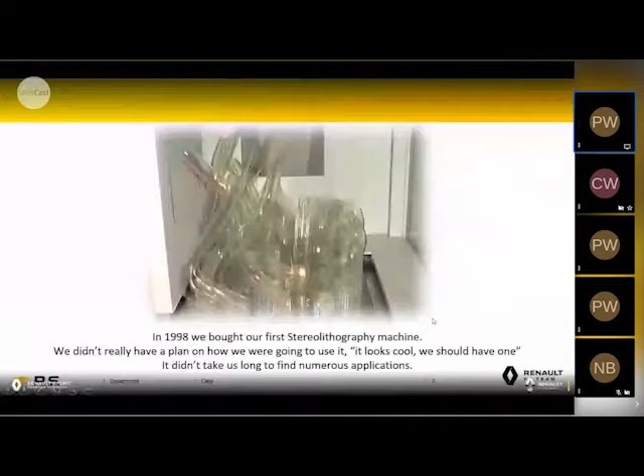And let's get that up. There we go. So in 1998, we bought our first stereolithography machine. We didn't really know what we were going to do with it. We didn't really have an application for it, but the ops director at the time said it looks cool and we should have one. So we did. And it didn't take us too long before we found lots of applications around the factory. Obviously, form fit function was an easy one. But then we started looking into what else we could do.

And so why do we use additive? Well, Formula One's a very fast turnaround sport. Everything is about time to market. Everything is about getting things to the track as fast as possible. Our lead times are regularly days, sometimes hours. I've been known to take a part off a machine at 6 o'clock on a Saturday morning and drive it to Silverstone and fit it to a car for the event that day. So it's all about turnaround time for us.

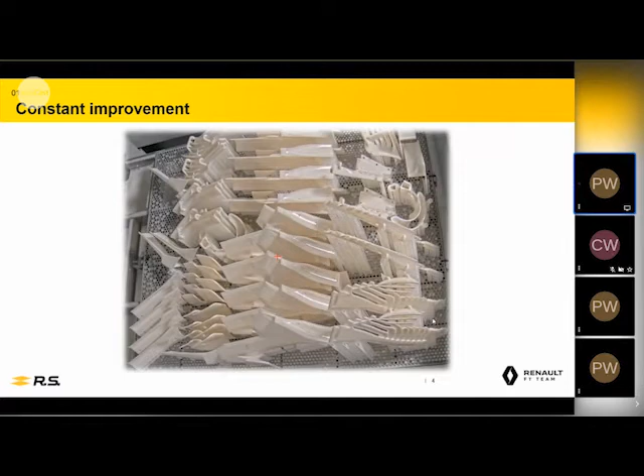So we use an awful lot in our wind tunnel in a constant strive for improvement. Somewhere in the region of 600 parts a week come off our SLA machines into the wind tunnel. Small variations on a theme usually, with the aim to gain 0.1 of a second here, 0.1 of a second there. Customization is quite a big one, and everything changes regularly. We don't have a car for the year. It changes for every event.

Formula One cars run at a temperature, so the cooling isn't there to make it as cold as possible. It's there to bring it to the correct operating temperature. So as we go to different tracks with different ambience, we could change that duct to give a larger or a smaller amount of air, thus giving the correct temperature.

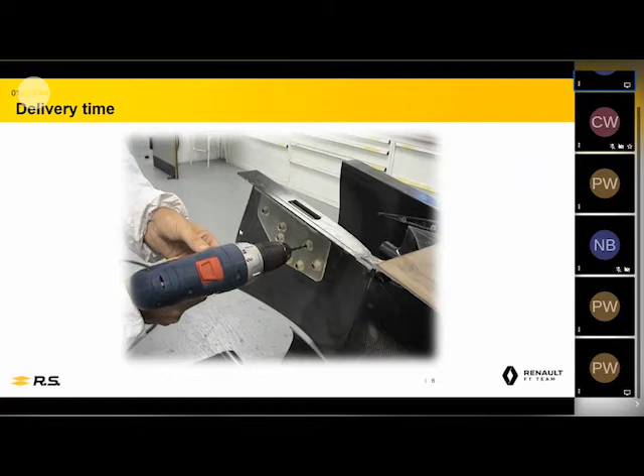We also found we could speed up our delivery time by making any modifications within the car, both at the factory and at the pit lane, by manufacturing jigs that were 3D printed, rather than taking the whole thing back to the machine tools and drilling extra holes or trimming or scribe lines, that kind of thing. This speeded up our time to track and modifications for the track quite dramatically, and meant we were able to send out repair kits and modification kits after the car had left the factory for the track. Sometimes it takes a while to get there.

Low volume manufacture for us is quite key. So a production run for us is 5. We don't make more than 5 of anything, or rarely. When we do, they usually changed by the time we've consumed the volume, or before we've consumed the volume. So toolless manufacture, no need to wait for tooling, is quite a key process for us. Speeds things up dramatically.

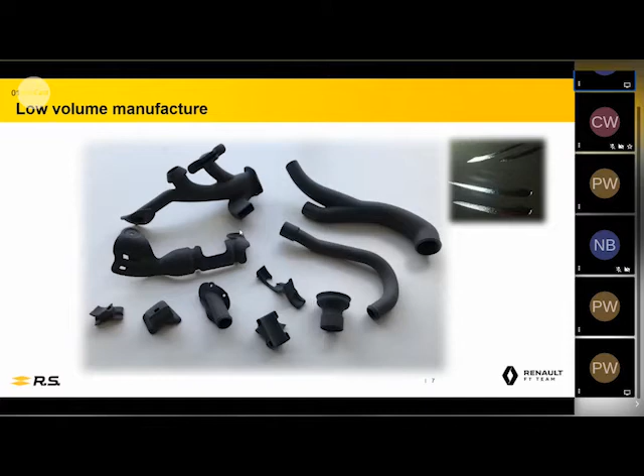All those little components there are manufactured with a carbon filled nylon on an SLS machine. It's actually a material we developed with Boeing to put parts on vehicles, both for us and them. We didn't like what was commercially available, and so we made our own. Kind of unfortunately, I guess, for us, we can only use materials in Formula One that are commercially available. So we had to use someone to manufacture it for us and then make it commercially available to anybody.

Design for additive is quite a hot topic at the minute, and it certainly presented us with a few issues. All of our design teams don't focus on a single style of manufacturing or a single technology. They have to be able to convert between composites, additives, subtractive, fabrication, welding, and so they have to kind of be jack of all trades. And so it's been a bit of an education in bringing that along. So we've adopted additive quite heavily on the metal side. We spend an obscene amount of money, but then that's Formula One in general.

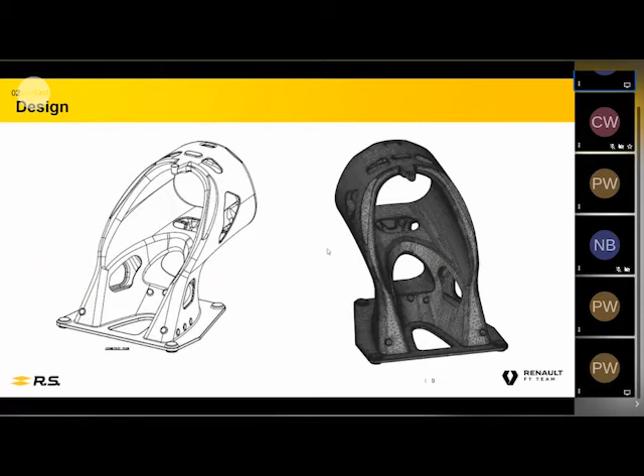So the picture on the screen is a design for our roll hoop for a couple of years ago. The roll hoop is a one-hit item, so there's no fatigue load or anything on it. But by regulation, it has to pass a rather stringent static test before we can put it on the car. So it's designed to fit within the envelope of the machine it's designed for, in this case, a 400mm cube powder bed fusion machine. It's also designed to be built at a certain orientation, meaning that there are no internal support structures, because they would add weight to it.

But we also had to consider we wanted to better the result we got from casting. And we'd been casting these for a number of years and got exceptionally good at lightweight casting patterns and lightweight castings. But we wanted to improve that, and we needed to improve the lead time. 12 weeks for a casting for us is far too long, and we needed to bring that down so we could give our design team, our aero team, longer in development before we had to actually manufacture the car.

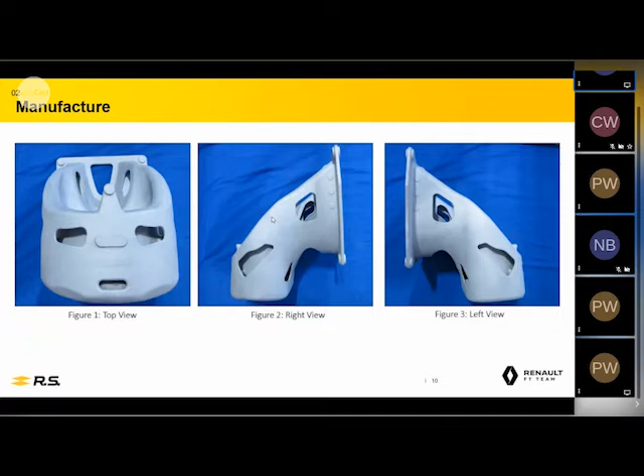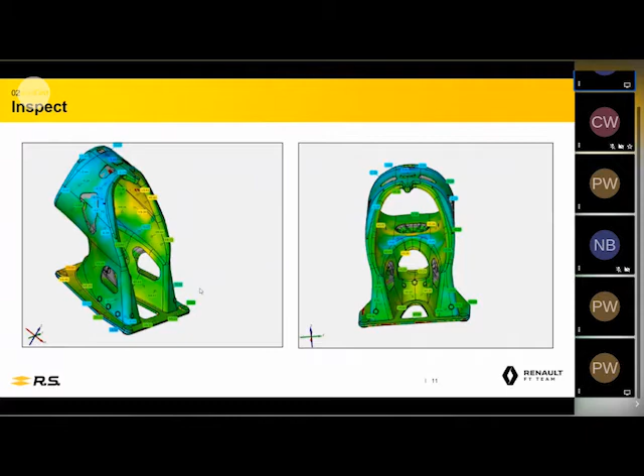When we brought the piece back and inspected it, it conformed. It did what we wanted it to do. So that was the result. This piece doesn't see the airflow. It's encased in a carbon fiber shroud, so it didn't need too much finishing. It just needed the interfaces where it attaches to the car to be machined.

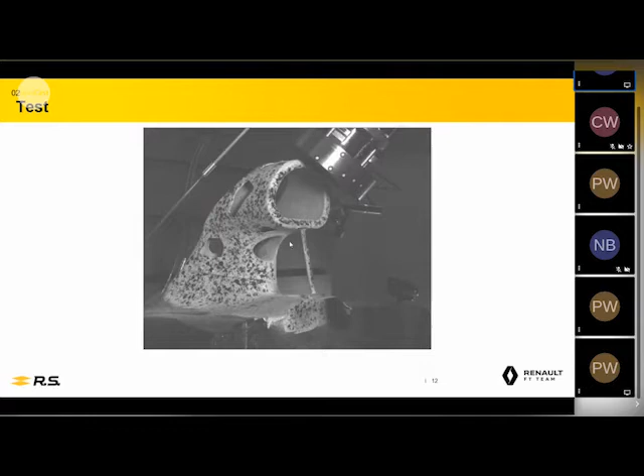We have been concerned about fatigue life of additive parts, and it does give us an issue, and it's something we're striving to work to improve upon. But certainly high fatigue parts are a complicated thing to do with additive.

Validation: we use additive to validate both on the track and in the labs, in the workshops. There's an oil flow rig on the right. Some sections of that front wing are made in additive, and we actually run them on a Friday. And if we like them, we may consider running them on a Saturday. More often than not, we then take them back to the factory and remanufacture them in carbon fiber. It's obviously stronger and lighter.

But in some instances, like the little gill structure in the rear wing end plate there on the left-hand side, that was a permanent fixture because we could make that more efficiently than we could in composite. Again, it's all about the speed. It's about no tooling and being able to alter that part quickly for different circuits, different downforce levels.

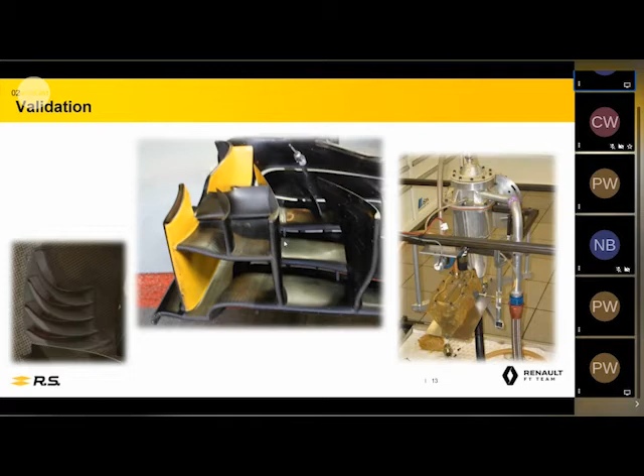End use: we do use a lot of additive on the car, particularly metals, but also in polymers. The item on the right is a titanium tailpipe. Our exhaust system has to be in Inconel by regulation, but from a certain distance from the turbine, we're allowed to switch over to titanium.

The item on the left is what we call the debris catcher, and because the exhaust pipes on Formula One cars are usually big enough for the turbine wheel from the turbo to go all the way out the back, we have to put something in place that will arrest it should it separate from the turbine shaft, and that's the primary function of that propeller-looking piece within the exhaust.

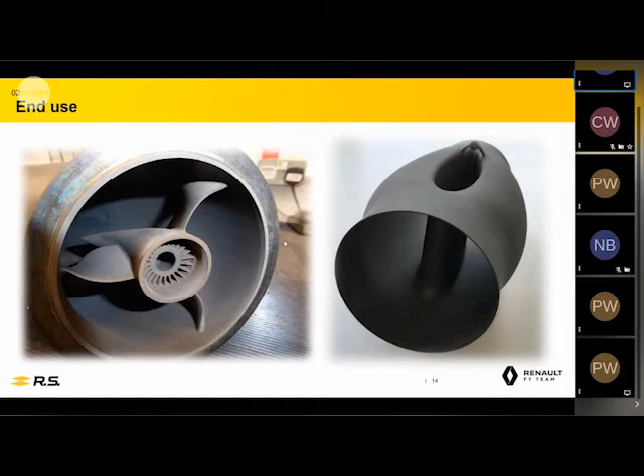There are a number of components there. The larger image, top left, is an aluminium strake. In itself, not a complicated item to machine, but very heavy, or in our world, quite heavy. So we made that one with a 0.5 millimeter aluminium skin and polished it. The very lightweight honeycomb structure inside it was only there to give the skin some sort of stiffness.

The smaller parts on the left are wind tunnel components. We again consume vast amounts of additive metal in our wind tunnel on front wing sections, and various clips and things that hold all the assemblies together that take quite large loads even in the wind tunnel. Our wind tunnel model is a 60% scale model, so the downforce levels even on that are still quite high.

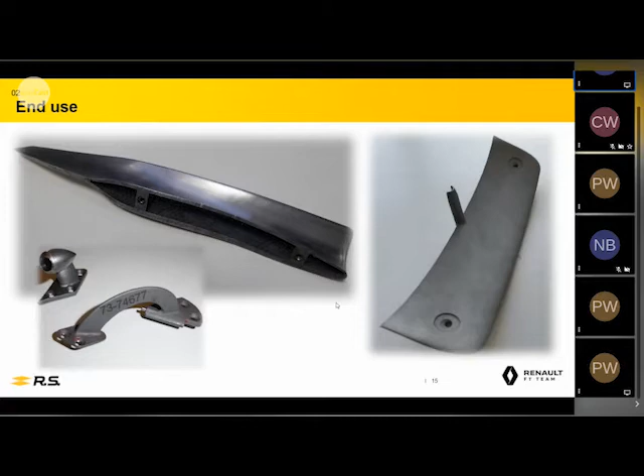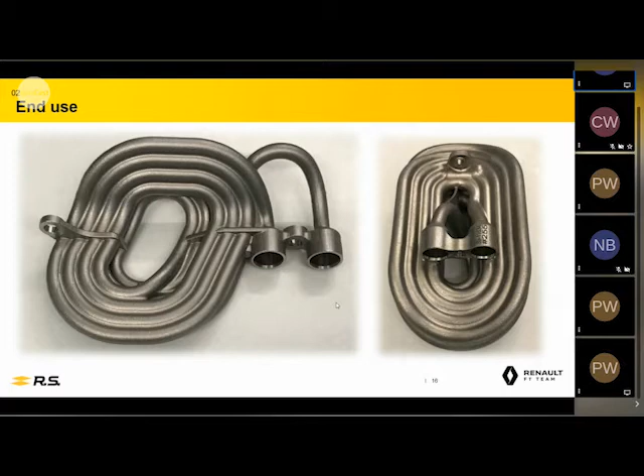This was quite an interesting one, actually. This is an inerter coil. It's part of our suspension setup. So basically, we needed a very long, thin pipe packaged in a very small space. So these perform that purpose, and that's their only purpose, to hold hydraulic fluid, and it's connected to the suspension system. That's a unique part that you couldn't make any other way other than additive.

Observations, what we've seen going along. New technical regulations are coming to Formula One. The FIA, our governing body, sees additive as an extremely sexy, high value technology, and they aim to use Formula One to promote that. So we're opening up a new set of regulations for 2022 that allow certain materials that are currently banned in Formula One to be used, providing they are manufactured additively.

Because Formula One is probably the only industry in the world that, if it thought it could get an advantage by additively manufacturing a billet and putting it on the shelf to machine it later, it would. So we also had to include a regulation that said the final part had to be within a percentage of the part that was additively made, i.e. we could only take off small amounts of material with subtractive to apply the surface finishes and the high tolerance detail where needed, but the bulk of the part had to be made in an additive method. This was quite essential because, as I said, if we thought the fastest way to make that part was to machine it, we would print a billet.